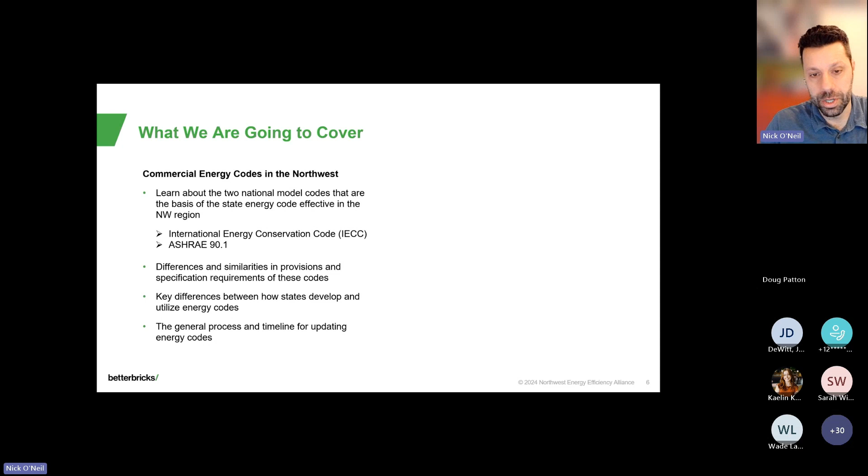Okay, so what we're going to cover today, we'll learn about the two primary model codes that form the basis for many of the state energy codes throughout the U.S., particularly the Pacific Northwest. Highlight a few similarities and differences between those, some key differences in how states go about developing and utilizing energy codes and what that process looks like and the frequency of that process, and then the general timeline for updating energy codes on a rotating basis.

The second part of the presentation will talk at a higher level about what codes are doing now and what they're likely to do in the future. What are some things we see coming down the road, how you'll interface with codes going forward. And then, talk a little bit about how NEEA gets involved in energy code development, specifically in the Northwest for the two codes that we have here, but also elsewhere as it influences state code development throughout the states.

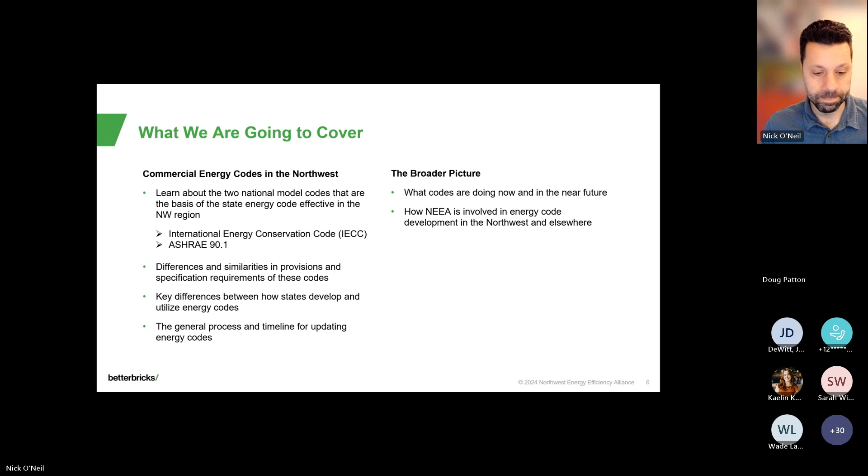So we'll begin with a little bit of background. There are two primary commercial model energy codes to choose from. The first one we'll talk through is ASHRAE 90.1. That is published on roughly a 3-year cycle. It's a lengthy technical subcommittee process to add elements or remove elements from 90.1. You have subcommittees for HVAC and lighting, water heating, things like that, that will look at proposals, vet them through a subcommittee process, and then present them to the ASHRAE technical committees to get approval to roll into 90.1.

Generally, it's thought to be the most rigorous technical process among the energy codes. There's a lot that goes into it before it comes before the final code committee for adoption and rolling into the codes. And it's a lengthy document. It covers all the climate zones in the US. It typically has separate requirements for each of those climate zones if it's weather dependent or influenced significantly. For reference, the latest version of 90.1 is close to 500 pages when you include all the appendices and references and things like that.

They do publish addenda between cycles. We'll talk about those in a minute, but that basically gives you a sense of what the next code might include. A lot of these addenda are elements that didn't make it into the first round of the code, but they were sound and ready to go, and they'll be rolled into future versions. So it's helpful to look at those to get a sense of what's coming down the road. And the important thing about 90.1 is it's really only intended for commercial or industrial facilities. It's not a residential-based code, although you've got residential occupancies that may be part of a commercial building where it does cover that.

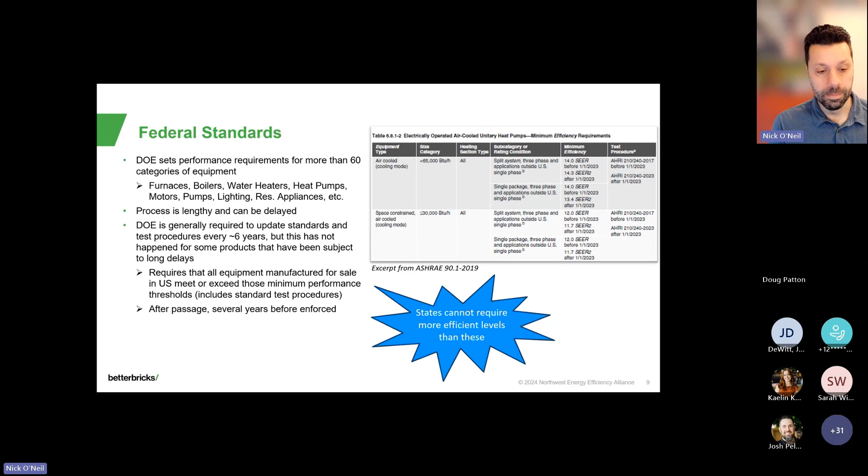So they do recognize that it can take manufacturers a few years to reconfigure tool sets and whatnot to meet these new requirements. So the whole process can be 7 to 10 years from when a standard first starts to when it gets updated and enforced. And the real big reason to bring this up now is that state codes cannot require more efficient levels than these minimum performance standards.

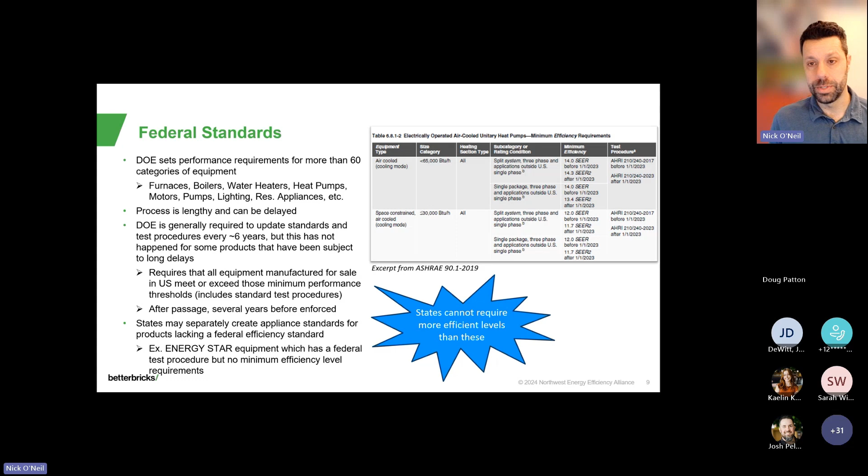So they can create separate appliance standards or standards for products that aren't regulated by the federal government. An example of that is Energy Star might have a piece of equipment that has a test procedure, but it doesn't have a minimum efficiency level in the standard. And states can require that, but they can't go beyond that. That's a term we call preemption, and states are disallowed from requiring that. Now, I'll say this, and I'll provide some caveats to that later, but by and large, when you see these tables printed in codes, these are actual federal standards that are just copied into the codes for reference.

Okay, so state energy codes. We talked about the two model codes, 90.1 and IECC, and what are state energy codes? State codes provide performance requirements, mostly for large systems, the envelope, HVAC, lighting, power density, things like that. They often do include those equipment tables, and that's mostly for ease of looking at one document and having everything there, rather than having a designer have to go reference the federal code of regulations for the efficiency level of a heat pump. It's all right there in the code so they can follow through. So that's why those tables appear there, even though they're not really governed by state codes.

They're just referenced there. State codes often use one of those two model codes, 90.1 or IECC, to build off of and add amendments. And so you can see an example of one of the amendments here. This is the 2021 Oregon Energy Efficiency Specialty Code. You can see they've struck out a provision there and added their own language in underline. So this is a very common thing that a lot of state codes do. They will take that model code to serve as sort of the base template, and then they will modify things that are unique to their area.

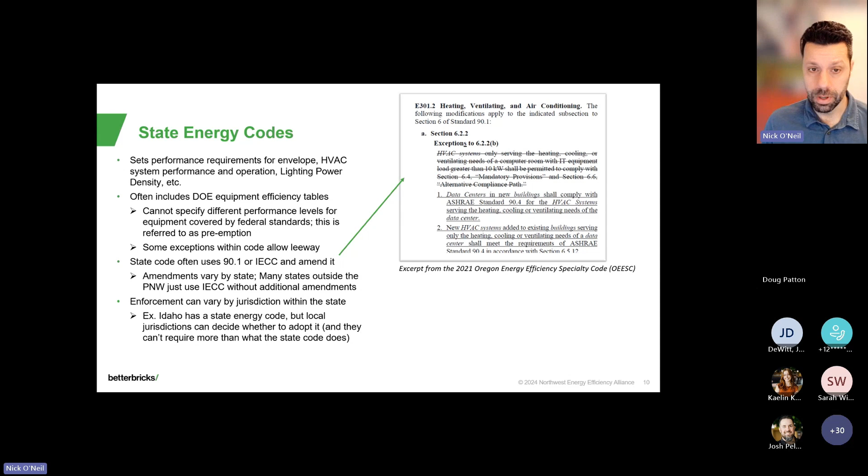Enforcement can sometimes vary within the state. So Idaho has a state energy code, but local jurisdictions can decide whether to adopt it. And if they do adopt it, Idaho has a provision that they can't go beyond what the state has required. So they can't really take the code and go further with it. That's not true for all states, but in Idaho, that's one unique provision there.

And I'm going to say a quick thing about dates, because you're going to see a lot of dates throughout this presentation. And when you look at codes, be careful with the dates. They don't necessarily correspond to the version of the document being used. So Idaho uses the 2018 IECC, but they call it the 2020 Idaho Energy Code. Likewise, Montana and the Washington State Energy Code reference the 2021 IECC. In that case, Washington aligns with it, but Montana just calls it the Montana Building Code. And here in Oregon, we use 90.1 version 2019. That's called the 2021 Oregon Energy Efficiency Specialty Code. So mainly just saying, don't get hung up on dates for what version of the code is being referenced. You really just have to look at, in the fine details, what version they are using as their model code there.

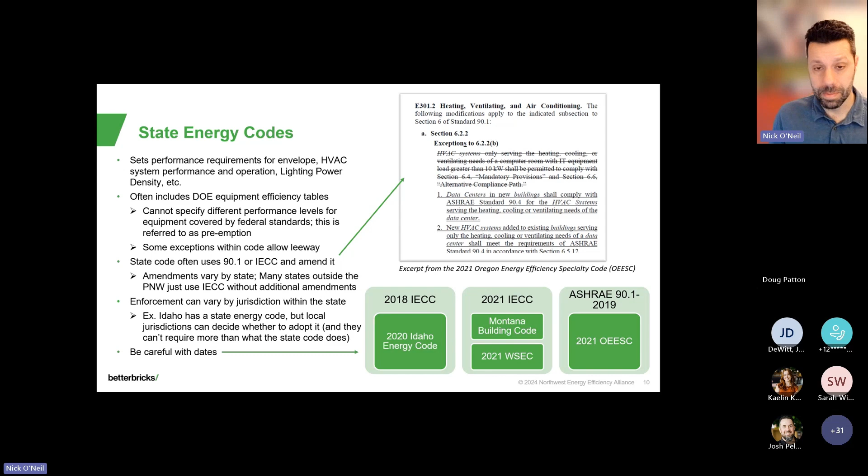So how do we look around the U.S.? This is just a relative level of stringency. You'll see here, this is by energycodes.gov. They have a reference to 90.1 versions throughout the U.S. Not all these states use 90.1. In fact, very few do. But it gives you a sense of stringency among the different states to show how the comparisons are.

So you can see the Northwest, for Washington, Oregon, and Montana, we are at almost the most recent version of 90.1, which is 2019. That's the most stringent. Idaho lags behind in its stringency down to 2013. So I'll show you a little bit later what the stringency levels look like over time. But in general, the states here with the green are the most stringent, and those down in the orange or in the white that have no statewide code are the least stringent.

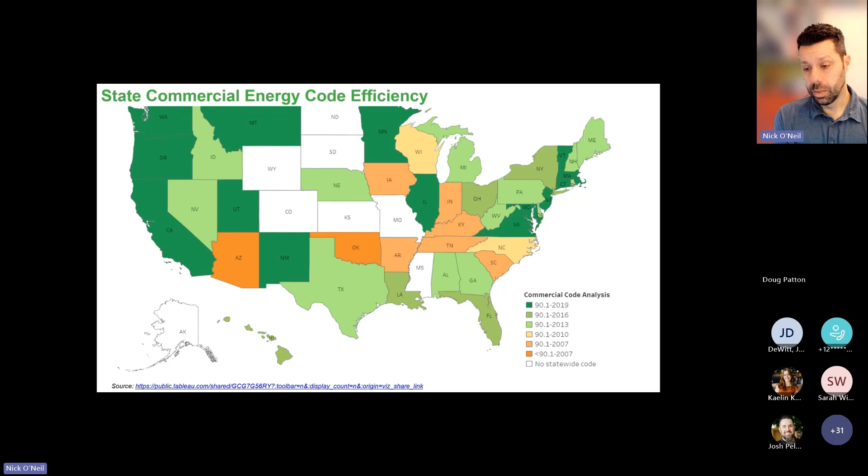When we look at our region in particular, the most stringent is definitely Washington. So Washington uses the 2021 IECC and then has a lot of amendments to it that are unique to Washington State. And once Washington sets its state code, the city of Seattle actually takes that code and then adds more amendments to it unique to the city, which results in about a 10% increase in stringency over that. So Seattle, you could say, is maybe the most stringent city with respect to energy codes in our region. And then going counterclockwise, Oregon has 90.1 2019 with several Oregon amendments. They will shift to the new 2022 version next year, starting in January.

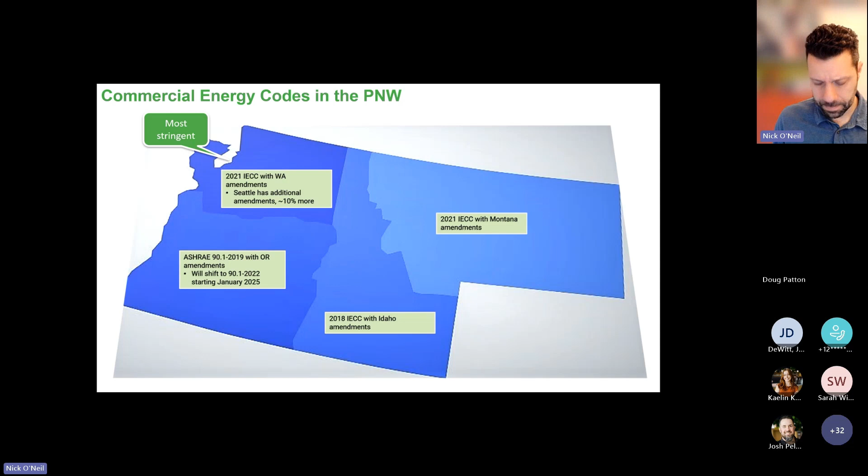Idaho references the 2018 IECC with several amendments, and then Montana, the 2021 version of IECC with Montana amendments. And we'll talk about amendments coming up. So let's talk about a couple of the similarities and differences between these two different codes.

Now, performance path allows some more design flexibility. If you've got a complex building type that doesn't quite fit in the prescriptive path, modeling can help really tease out the compliance for that with energy code. It allows for a lot of trade-offs. So code has a lot of stringency on things like window to wall ratios, where you can't have more than 40% glazing compared to your wall.

Well, obviously, you go downtown, you can see a lot of buildings that look almost 100% glass on the outside. And one of the ways that those buildings can comply is they can trade off for better HVAC system or lower lighting power density. So they can use that model path to say, yeah, we're going to put more windows in, but we'll make the building more efficient with other systems. And on a net basis, that will be equivalent to what you would have required otherwise. Also, buildings that look for like LEED certification or other green building designs and want to capture the credit for going beyond code, they can use a performance path to demonstrate that.

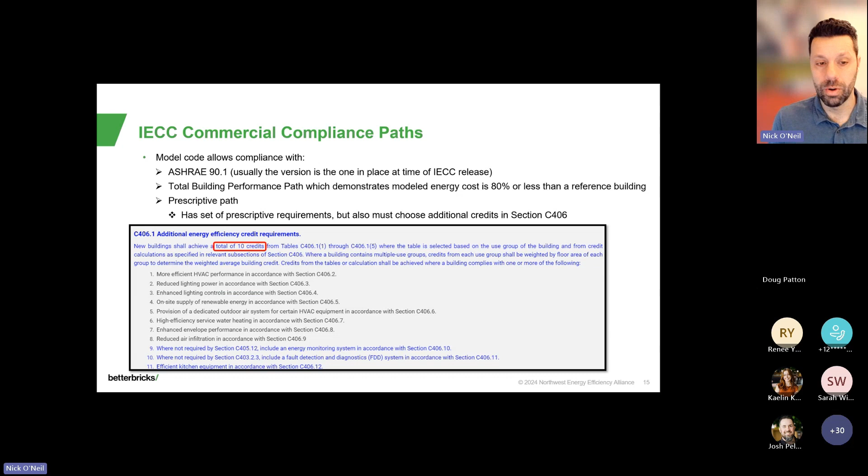So it really depends on where your building is located in the climate zones and how much credit is given to that measure. Now the credits are intended to be based on equivalent energy savings across the building types. So IECC has done a lot of modeling, or really the labs have done a lot of modeling to support IECC on what's the equivalency of this measure when you look at it in different climate zones in terms of how much energy it saves.

And this provides a lot of flexibility, but also obviously adds some complexity of how do I comply with code and what are all the things I need to do here. Now I'll point out that one interesting feature here is this cooling improvement and heating improvement, the first two lines, or the first three lines really in here about efficiency improvements.

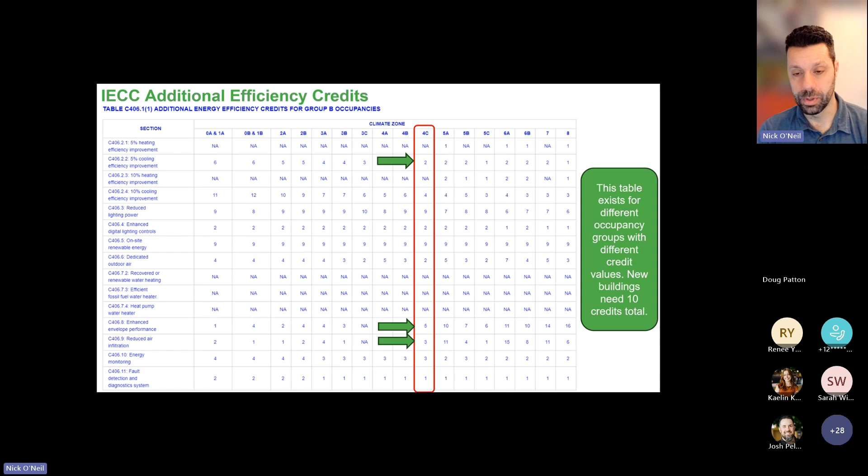Now, that obviously looks like preemption. You are requiring something that's greater than what the federal standard is. But the way codes get around this is that this is an option. It's not mandating that a building has to follow this or a designer has to follow this. It's providing it as an option.

And by doing so, both in this provision in code as well as the table that I just showed before, you are giving a builder the option of providing more efficient equipment without requiring them, and therefore you're not running afoul of federal preemption requirements. So that's really the only case that I've seen in codes where you can require something better than what the federal government requires for manufacturing, is to have it as an optional path to take.

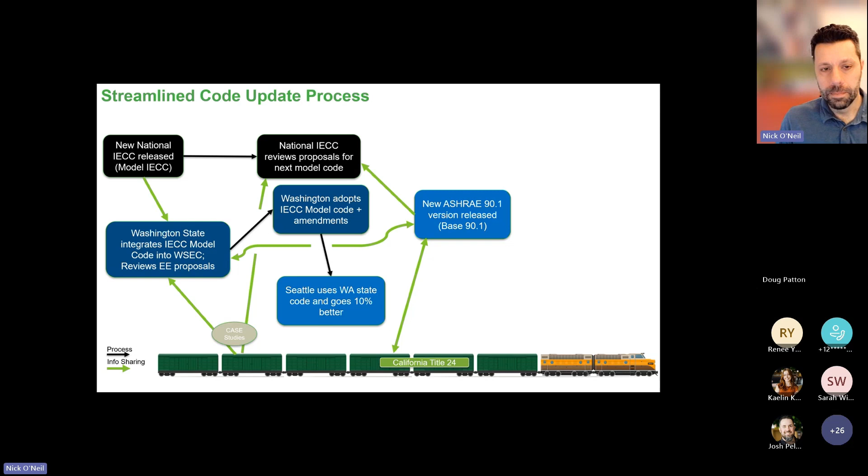Washington State's code provisions may provide some input to 90.1. So it's a real big info sharing party between the different code versions, depending on when they're released and what's ready in time to use. At some point down the road, 2 years or so, the IECC national code will start reviewing proposals for the next model code and start the process all over again. And similarly, they're going to borrow from whatever has been developed before, either with 90.1, Title 24, or Washington State.

After 90.1 is released, Oregon will add its OEESC amendments to it. And then they will adopt a new version of that after DOE certifies 90.1. That's sort of a technical piece that has to happen where DOE looks at all the provisions and the savings from that and certifies the compliance software related to 90.1. That's when Oregon officially will adopt it.

Now, along the way, there'll be addenda and errata that are included in there. I'll note this later on as well, but Oregon will adopt all the errata, obviously, to correct mistakes, but it does not adopt the addenda unless specifically called out. So addenda that are released from 90.1 don't automatically go into the Oregon Energy Code once they are released by 90.1.

And then we'll kind of continue the process. It starts over. Another national IECC model code is released. And at that time, Idaho and Montana may choose to adopt those IECC versions or previous versions and add their own state amendments.

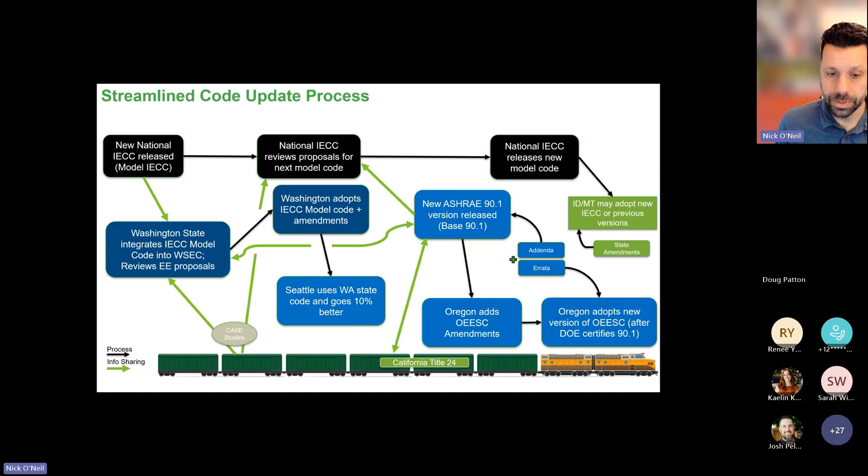All right, so we're going to dive in a little bit to the individual energy codes here and what they look like. So as I mentioned already, Oregon Energy Code is the OEESC, Oregon Energy Efficiency Specialty Code. All of its codes, including building, mechanical, plumbing, they're updated every 3 years. Now, Oregon refers to this as the OEESC. It's actually Chapter 13 of their Oregon Structural Specialty Code.

Now, Washington State has the State Building Code Council. They oversee updating Washington State energy codes. Just to note, Seattle is updated by a separate entity, the City of Seattle's Department of Construction and Inspections. They're in charge of updating the Seattle Energy Code after Washington updates its state code. And then similar to Oregon, they update all their building codes and energy codes every 3 years or so. There's also this 6-month grace period, usually after the code is adopted, before it's required by designers to use it.

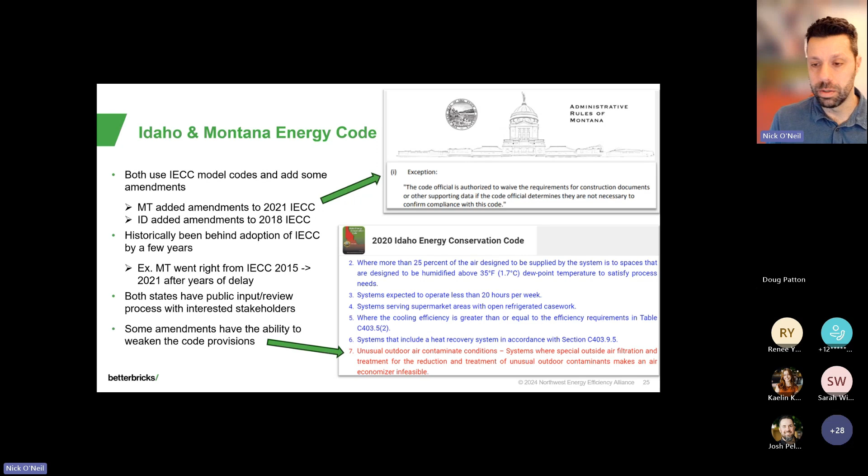Conversely, Idaho has done that in a few cases. There's not many, but there's a few areas where they've actually added an exception, in this case, which might weaken the code, allowing more or less stringency on when an economizer might be required. So the proposals can go both ways. It doesn't always result in an increase in stringency of the code, depending on the unique nature of the state and the provision.

Okay, so that's a lot on the code process and how it's updated, but let's level up and talk a little bit about the broader picture. So how NEEA interfaces with codes. Mentioned a little bit already, but NEEA helps support the code development through proposal writing and analysis with market partners. They do that for both the state energy codes as well as the national model code, the IECC.

So here's an example of a proposal to amend the demand control ventilation for kitchen exhaust hoods. So they'll help support the writing of this proposal and any data to support that to bring before the energy code TAG in Washington. They also provide resources to assist with code development. So you can see here in Idaho, they have a ventilation effectiveness study that they produced that's on the Code Collaborative website, so people can look at that and use that as a resource when they're developing code proposals.

And then one of the biggest things that NEEA does is they provide training. So they provide training to code officials, Better Bricks audience like we're talking through today, builders, utility programs. We've done code trainings for architects and engineers and design consultants as well. And then they also help develop tools to assist with compliance. So in Washington especially, there's a lot of software tools, Excel workbooks that can be helpful to demonstrate compliance with the energy code here, and NEEA helps support that through funding.

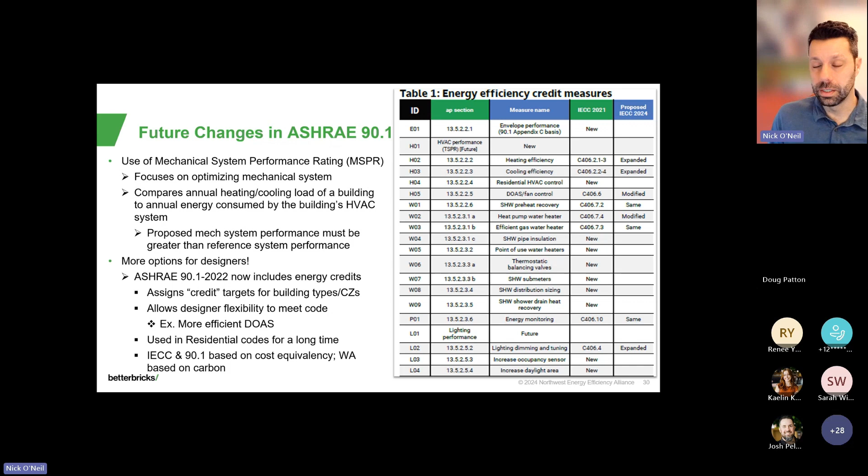So where do codes go from here? This is a little bit of my take and a little bit of what we've seen through the code proposals. So we'll continue to find some small fixes in prescriptive path to reduce energy use. There's not a lot of low-hanging fruit left for new buildings, and there are some limits for alterations. You could increase the insulation level on piping and ductwork, but you're going to run up against some practicality limits in the space that's in an existing building, and the cost to do that kind of work. So the people that provide code proposals understand that there's sort of a limit to what we can provide there.

There'll be more stringency and specificity on controls. I see that as a big area in codes that's going to come out down the line, getting a little bit better about what the control features are that are required in units, pieces of equipment, and more integration with those controls in systems as well. Some of the progressive codes will also start focusing on other benefits. So water is a big issue in California. California's Title 24 is looking at the water energy nexus and understanding what the benefits or drawbacks might be from energy use as it impacts water use. And in Washington, they've already got a focus on carbon.

EUI targets are going to become, I think, a bigger part of code, especially as these states adopt building performance standards that are looking at reducing EUI levels. I think there'll be some alignment between what code is trying to do and what the state performance levels are trying to do to make it easier on designers overall. I'm sure there'll be some expansion on energy credits. There'll be different flexibility options. Maybe some will go away that aren't really utilized very often, or be modified to better fit modern day technology.

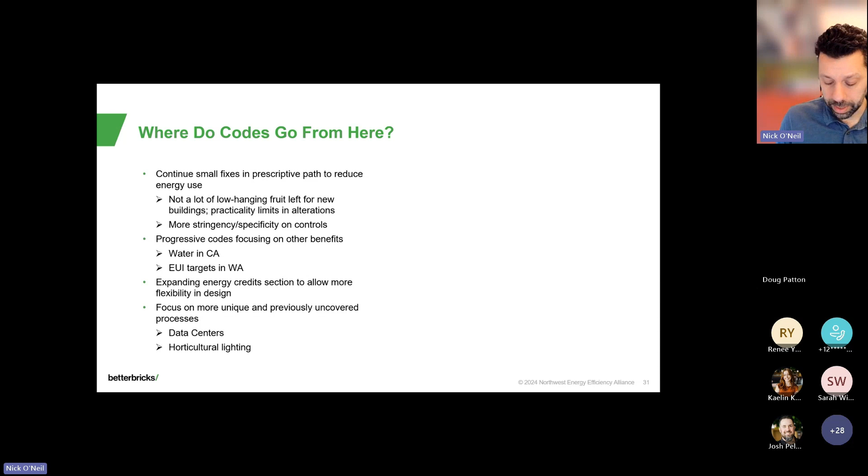I also see a lot more focus on controls and the system operation versus the specs. Lighting controls and HVAC controls are going to see greater requirements. Chiller plant monitoring is something that's come in, DCV, demand control ventilation, that's separate by climate zone, and the use of energy recovery and some other control elements for smaller equipment. And I also see some other performance path options. We've got this TSPR, mechanical system performance ratio for HVAC. Could be something else for other systems as well, whether for service water heating or other process loads that are increasing in operation.

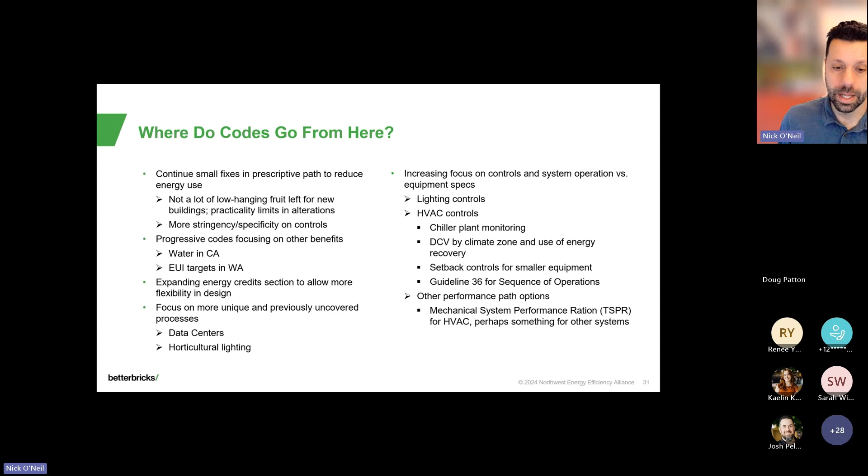I get asked this a lot. Are codes actually getting easier? And in some ways I could say, yeah, they are. There's a lot of work that goes into increasing clarity and requirements that reduce the burden on designers.

It may not seem like that, but there's a lot of times that people debate over commas and the word "or" included in code proposals, because something as small as that can have a big impact on how people interpret the code. And so there's a lot of thought into how do you write this so that people can follow this, designers can follow this.

I think there's generally an alignment that's happening with 90.1 and IECC. If you are a designer that works in Oregon and Washington, Oregon and one of the other states, you've got two different model codes that you're looking at, and it's really confusing to keep track of what provision works in one state but doesn't in the other. And so it's helpful to have some more alignment coming down the line.

More builder flexibility with those additional credits like we talked about. And then most codes have this simplified path to allow smaller or less complex buildings to comply with code without having to go through every single section. So that's definitely a step in the right direction for making the codes easier. But I also say that no, they're not always getting easier.

Systems and control requirements are getting much more specific. One point is there's more integration between the trades. So lighting and HVAC have some integration here, especially as we look at sensors to look at occupancy and how that ties into ventilation and heating and cooling. So there's some more complexity in the design element of building to comply with code. There's also more options like we talked about, but that brings some confusion.

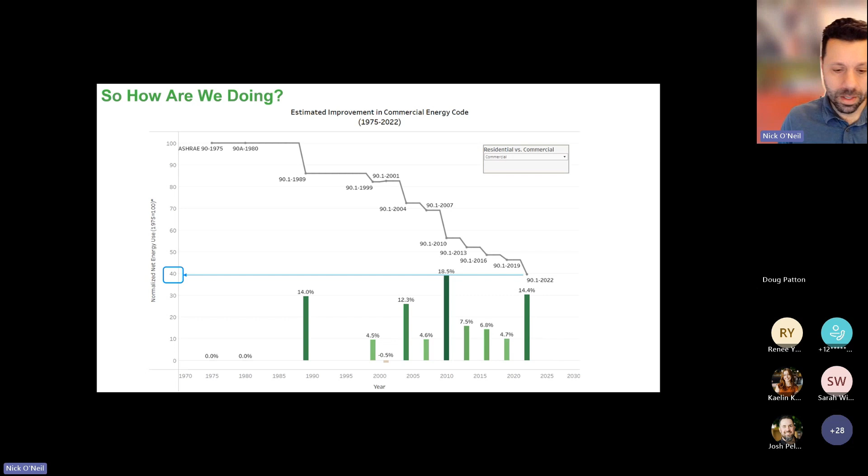And to wrap it up with why do we even have building energy codes? Well, obviously you want to improve the efficiency of a building and reduce the associated greenhouse gas emissions of the building stock. The broader picture here I see is that if buildings were allowed to just use as much energy as they want, not only would that cost be passed down to tenants of those buildings, but also utilities would need to build more generation resources, and that pushes the cost down to the ratepayers, you and I. So it's a key reason why efficiency helps keep rates lower than they would be otherwise, and buildings play an important part of that. They're also a critical part of state building goals here.

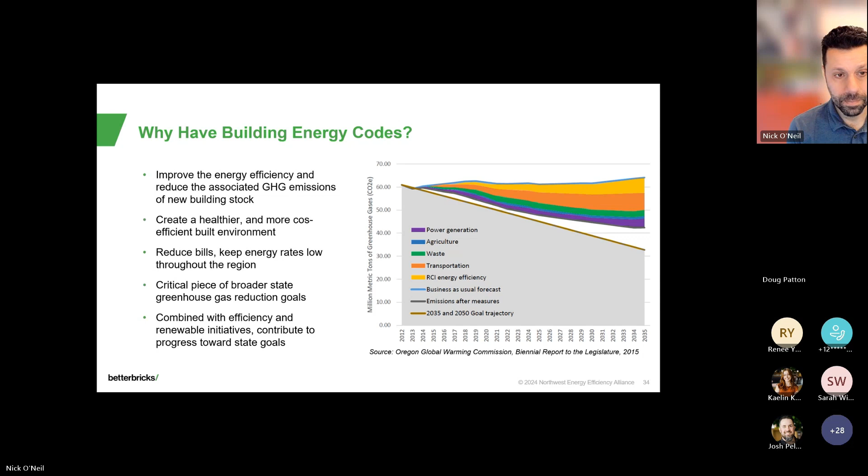You can see over on the right from a Commission report to Oregon back in 2015. The yellow slice there, residential, commercial, industrial energy efficiency, is a big slice of that. Moving from business as usual down towards the target, and so building codes are a big slice of that piece as well.

And then finally, just leave you some resources here on where you can find more technical assistance for each of the 4 states in the region. There's a lot of good contacts out there. If you've got technical questions as you go through energy codes, interpretation issues, contact folks here. They're very responsive in getting back to you and providing an explanation on how you interpret something and what they meant by this provision.